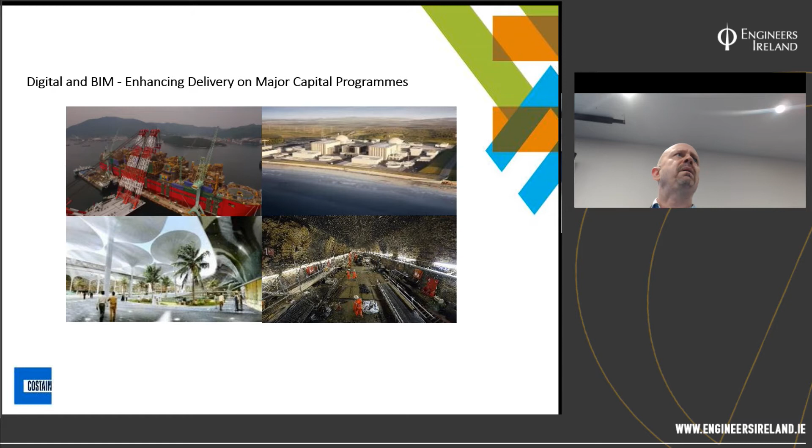So 4 projects, all using digital technologies, arguably BIM. I use the word digital and BIM very closely together because I actually have a problem with the acronym. So let's get straight to it.

How many of you in this room have heard of the word BIM before, by a show of hands? Good. How many, by a show of hands, actually know what it means? Less - well, actually only 2 hands. That's appalling. That's probably a lie. Anybody want to hazard a guess of what they think BIM is? Anybody going to be brave enough to volunteer it?

It's actually not as hard as you think. It's a very simple concept. The idea of managing information - and that's the I in BIM, because it stands for Building Information Modelling - is the most important thing. Information management is not a new thing. We've always needed information to design, construct and operate our facilities, or whatever asset it is that we are constructing.

The pyramids were built thousands and thousands of years ago, and the information needed to build them was described on what? I'm going to get interactive with you lot if it kills me. Papyrus. Who said papyrus? Jeff said papyrus because he probably heard me say it before, but he's right, he's absolutely right. So the information that was carried to the guys in the field, and the engineers and the architect, was written down, information on bits of paper. What has changed in those 4,000 years?

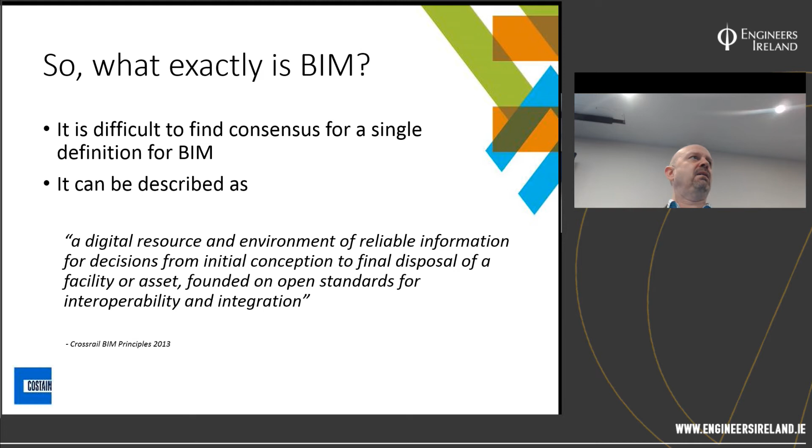So what exactly is BIM? It's difficult to find a consensus. Here's a description from Crossrail, one of many that you can find. I'm not sure if that enlightens you at all, but here's my own interpretation.

Put more simply, if you, whoever you are, during whatever phase of a project, can get the right information that you need, not too much, not too little, the Goldilocks Principle, and have it made available to you in the right place, in the right format, at the right time, and you trust it, the argument goes, you are likely to do your job better, or put more simply, you are likely to make better decisions. It is as simple as that.

So if you harness new technology and understand that information flows through the life cycle of the project and how it does so, then you're beginning to get the gist of what BIM is. It's not 3D modeling, it's not nice geospatial maps, although that's part of it, that's a way of managing information.

Many software vendors would have you believe that you can buy BIM out of a box. I'm not going to mention any vendors in particular, but you'll probably know the likely contenders within our industry. I'm not ascribing blame to each, it's just that if I was a software manufacturer, I think I might exploit that opportunity as well.

So they've been part of the problem in confusing what actually BIM is, and I think it's actually something a lot simpler. Get the information, make it right first time, better decision making leads to better efficiency. Is everybody clear on that? Did that make sense?

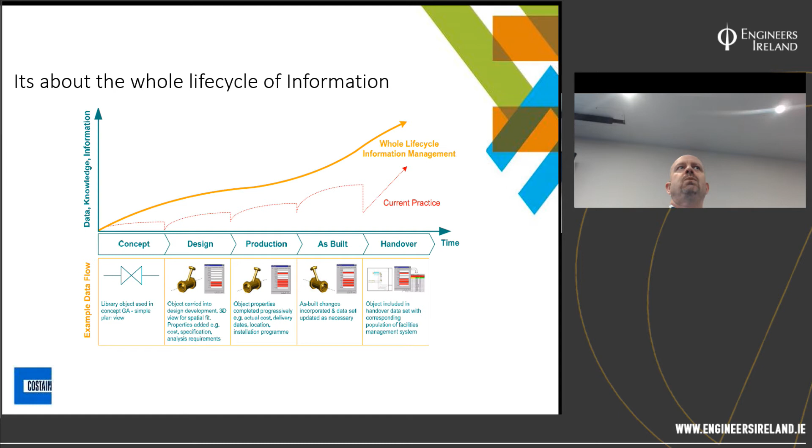So the other point I made was about the whole life cycle of information. Our industry is notoriously siloed by discipline. Interestingly, sitting here in the Institution of Civil Engineers, you could argue that some of the professional institutions are responsible for creating some of that siloing. We all have jokes, don't we, if we're an engineer, about an architect or a designer, somebody out on site, we make jokes about it.

But those professional barriers actually matter when it comes to managing information, and so does the information cycle. I picked something here, this is actually from oil and gas, hopefully this is easy enough to follow. So you've got some very basic phases in the life cycle of a project, from conceptual design through design engineering through production to as-built to handover.

I picked a pump or a valve, for example. So what you know about that asset very early on in conceptual design is probably some certain basic things that it needs to do, and that's information associated with that asset. And as it goes through its life cycle, we know more about it. When we start detailed design, we know more about it. When we fabricate it, when we install it, we know more about it. And during construction it's quite important because things tend to change quite a lot. We may change the design, and we need to record all that information because it's really important. Who for? It's really important for the person at the end who's handed over to, who has to operate it. So that information has value.

What's actually happened, and you've got a little red dotted line there, is that in current practice - it's getting better, but this slide is a bit old - at each point, each boundary layer between that life cycle, information gets lost. Picture it another way: it's a bit like guys and girls sitting behind walls, working away in their own way. They do what they need to do, and then they throw it over the wall to somebody else. They don't really care, or haven't traditionally cared about the next phase of the life cycle, just care about what they're doing. And in throwing that information over, some of it gets lost. Some of it is waste because it's information the person receiving it doesn't really need. So you see this kind of sawtooth growth of information.

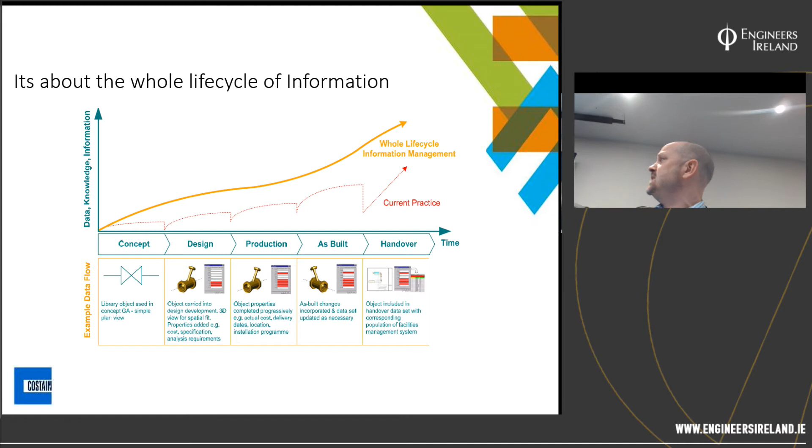There's another way of looking at it, rather than the sawtooth - you could say well, you just capture as much information as you can just to be safe. Well, that's equally inefficient, because you end up with too much information. Some of it is wasteful. So what you actually need is this nice, smooth, yellow line, this optimal transfer of information. And if I was to plot at any point - to my point earlier - if I was to interrogate that information at any time, depending on who I am, I just need to know just enough information that's going to help me do my job. Okay, so that yellow line just means optimal growth of information. Okay, so you're following me so far? Haven't lost anybody yet? Good.

Why is that? Because the types of information that we often need in design, in construction, and into operations will vary in type. We may have 2-dimensional drawings, we may have 3D models, we may have asset information, tables of information, we may have documents. In fact, on most projects we have more documents than anything else.

And you can have different systems that manage all those different types of data, because lots of software providers will do systems that are good at doing certain things. So CAD software, good at doing CAD. 3D modeling software, good at doing that. You won't find the sort of Lord of the Rings principle - you won't find one ring to rule them all. It just doesn't work that way. And in fact, many software providers who have tried to provide those kind of things often fail.

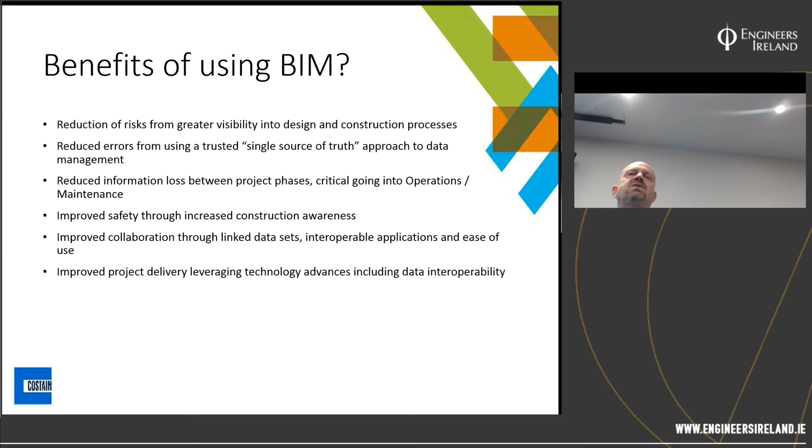One of the things I discovered at Crossrail was that was quite a significant challenge - getting people to understand that sharing information, working in different ways, challenged the way they were working already. And human beings are irrational, fundamentally. One of the reasons why I have very little hair now is because I have underestimated that challenge throughout my career. I am an engineer - I deal in predictability. When I've designed things, when I've worked on sites, I want absolute precision, I want to know exactly what's going to happen. Human beings are not like that.

You may well come away from this lecture, despite the fact I may have done a good job explaining to you, and you may also think I'm barmy. You may not agree with me, you may have your own irrational perspective on what I'm saying - that's your right as a human being, and that's what we deal with. BIM and digital is a manifest revolution in this industry about the way we do things, and one of the reasons it has gained little traction over the years is because people have underestimated that it's about change.

One of the things Crossrail really did well, I think lessons learned from the Olympics and Terminal 5, is to buy people into an ethos, that you're part of something big, part of changing something, and introducing new and novel concepts into that dialogue.

One of them, and you may hear it if you're involved in rail, is something called the digital railway. At Crossrail, we were encouraged to think very much about the importance of data and digital in the same way we think of physical things. So we were told we were building two railways, the physical one and the digital one, at the same time, and they were equally important. That was to try and get people to understand the importance of both.

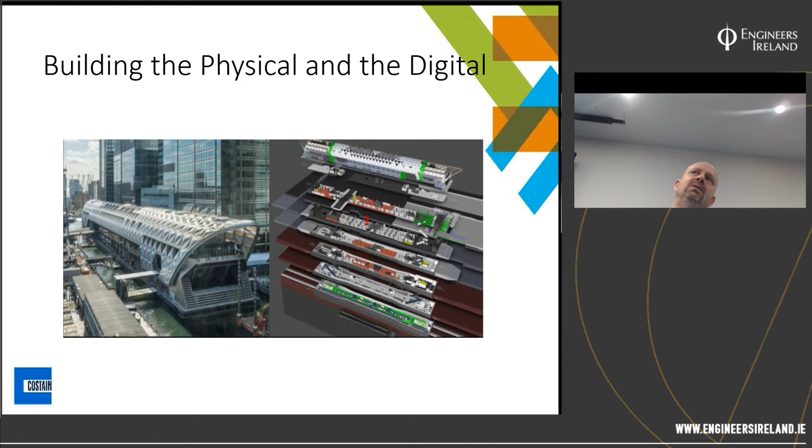So you should value data as well. If you don't, then it's just waste, you're actually throwing money away. So there's a cultural journey that people have to go on in this world, which will change thinking, and that's a significant challenge.

So the next few slides are really a bit of a reflection for me on some of these challenges and some of the projects that have tried to address them. I've mentioned Crossrail, so I picked on High Speed 2 here actually.

If anybody goes on the High Speed 2 website, you will see that it has digital and BIM written all over it. They have a vision. BIM is a change program, and if clients and companies don't recognize that, they will fail. To have a good change program, you need a vision, you need to know why you're doing it, and you need the leaders at the top of your organization to believe it and talk it. That needs to be articulated into some words, like engine for growth, 21st century transport backbone.

And then you need to describe what good actually looks like. If we go on this journey, what's going to end up happening?

Well, we're going to build something to modern engineering standards and use the latest technologies. What does that mean? BIM will form the information backbone of the High Speed 2 network through the life cycle of the project, eventually becoming the asset information model that everybody will use to maintain it. You may disagree with those words, but you've got an organisation and a project there that's aspiring to do something big, and you'll want to be part of that. You'll hear all your leaders saying it, and that happened at Crossrail with Andrew Wolstenholme.

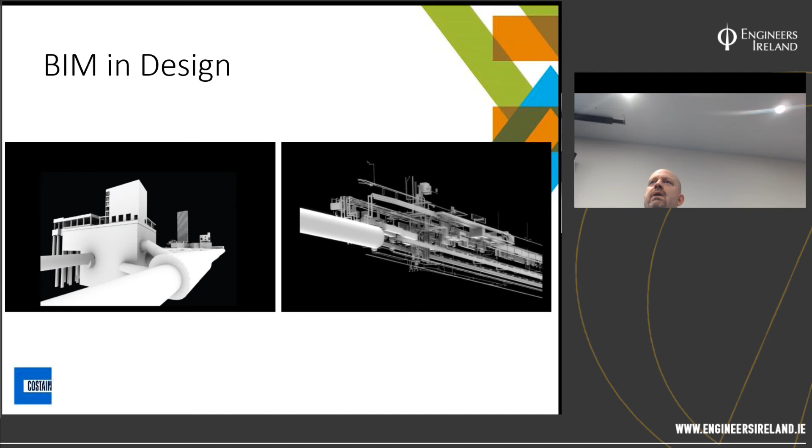I noticed that a lot in Crossrail when we started to show 3D models out on site to people who perhaps weren't engineers. When you're engaging with the client and getting them to understand what things will look like when they're built, people really understand 3D. They can really begin to see what things are like rather than putting a load of 2D drawings on a desk, which requires a trained engineer to try and infer and explain what that's like.

So BIM has been used in design and actually construction quite a lot. In construction, here's another example, and shamelessly, I've used a lot of examples from Crossrail here. Forgive me, it's just because it's probably the best source that I've got close to mind.

So if you're taking information into construction, on the left-hand side, installation progress reporting. It's exposing information to those in the field as to what is the cost of the sequence of construction, and exposing that information to the people who are doing it so that they can analyze and model that data and do things better, so they can see where the inefficiencies lie. We know this led to some efficiencies in time savings, process improvement, better quality records, good assurance data, and better maintenance benefits at the end as well.

One interesting thing I will mention is, however, that when you have better data and you start exposing that to people, it has a kind of counterintuitive effect.

On the right is 4D. So 4D is taking 3D models and adding time, the fourth dimension, to it. You can run things through in time and see what construction and sequencing look like. But it does require good input data - good plans, good programs, good Primavera plans, good Microsoft Project plans, whatever it is you happen to use, others are available. Once you couple the program to the elements of construction, because that's how you assemble a 4D model, you get quite a lot of power out of it.

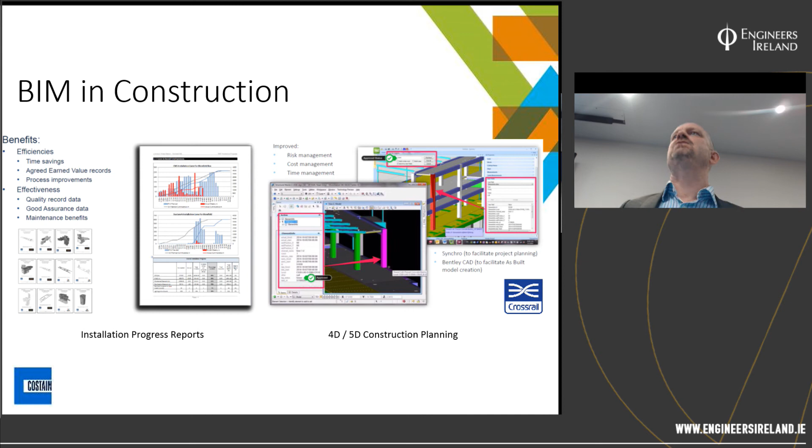This is just another example of the kind of cultural barriers you can have sometimes. On the face of it, what I'm describing, if you believe me, seems quite good, but actually the process of getting people to do it is actually very hard. That example about not upsetting people, because suddenly you might be threatening the job that they've done for the last 25 years, means you're going to get a whole lot of defences thrown up in front of you. So having good people skills, as I'll come back to later, is absolutely essential when you're going through a sort of change program.

Many of you in this room might be, I know I was, a past site worker. I always think with BIM you have to answer the 'so what' questions. I could ramble on for years about technology and the opportunities, but ultimately if it's not something that makes your job easier, then you're not going to want it. At Crossrail I was responsible for rolling out some mobile applications to the mining engineers and rebar engineers out in the field, telling them they didn't need to use paper anymore, didn't need clipboards anymore - we were going to give them an iPad and that was going to make their job easier.

But when I sold it in terms of technology, they just weren't interested. What they really needed to know was that it was a tool they could pull out of their bag and it was going to make their job easier.

So a slide like this is really helpful because it speaks to the guy in the field. If I can give that guy better information, wouldn't it be good if, when I'm looking at an asset in the field, I can see the current status on it, visualize it, know when it was installed, who installed it. If I can combine information from multiple sources when I'm on site, that might help me in the field as well.

Can I access that information easily? One problem we had at Crossrail was that many of the site offices were at least 20 minutes from the workplace. Field engineers doing inspection and testing were going out with bits of paper and cameras, walking 20 minutes out to record information, walking 20 minutes back because they'd forgotten something, then back again to sit at their desk and double-enter that information into a system. It was clearly ludicrous.

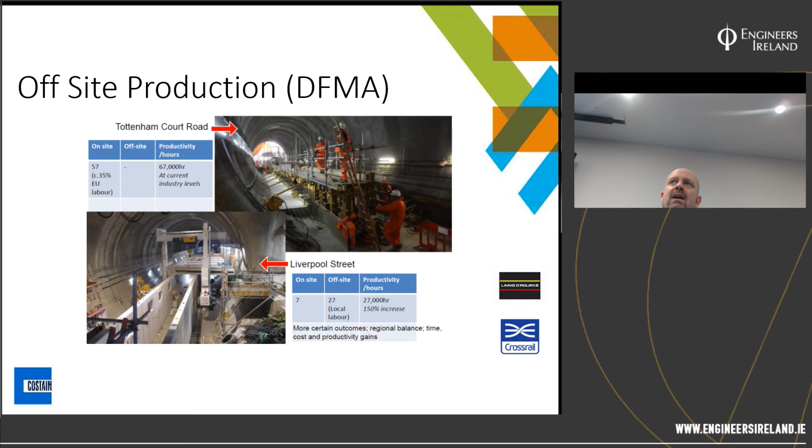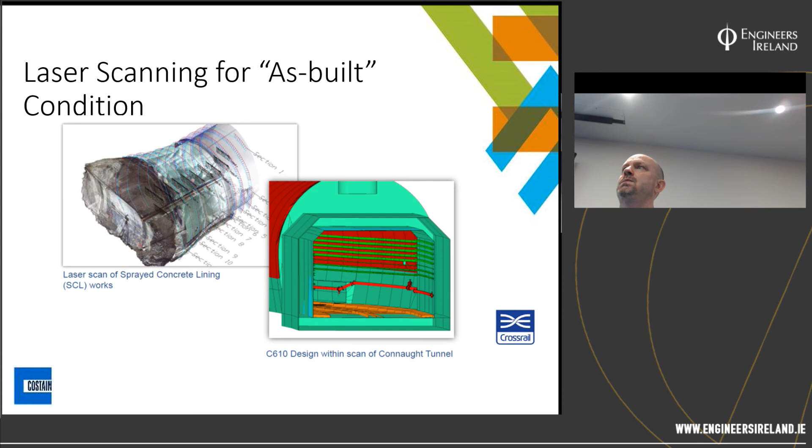So I've taken you on a bit of a journey, hopefully. I've tried to share with you the essentials. I hopefully tried to demystify things. It is quite a complicated subject, I won't deny it.

But one thing I wanted to finish off on is that we are crying out for people who are proficient in this area. People have turned their noses up a little bit and said BIM will never happen, digital will never happen. I can tell you it is happening in a big way. The UK government is driving it, it's happening all over the world. I don't have enough people in my team who are not only engineers, not only have a technical appreciation of some of the things I've described, but more importantly, have the ability to communicate and demystify. So one of the things I've tried to do today is a translation exercise between a technically difficult subject and answer some of those 'so what' questions.

We just need more people. We've got plenty of people who are perhaps CAD technicians or 3D modelers or who understand the technology, who are pure civil engineers. But the type of roles we need now, whether you want to call them a digitally enabled engineer, a BIM technician, a digital technician, or a digital consultant, we need more of them. We are at the vanguard of it now, and the reason I'm so busy is that I'm one of the few people who've become one of these hybrid beings doing this.